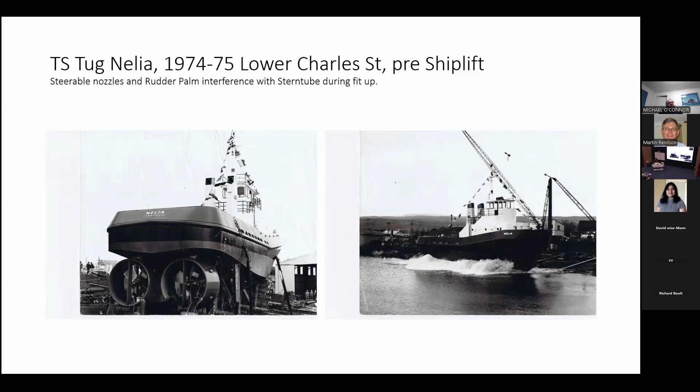During sea trials: first off, the rudder stocks below the neck bearing were 5 inches, talking old money, and above the neck bearing, because the rules said so, they were turned down to 2.5 inches. The builder and the machine shop tried to talk the designer into changing the size to about 4 inches, because it was just a waste of material and time turning it down. They wouldn't have it. During sea trials, going full speed astern and hard over to hard over, the rudder stocks twisted.

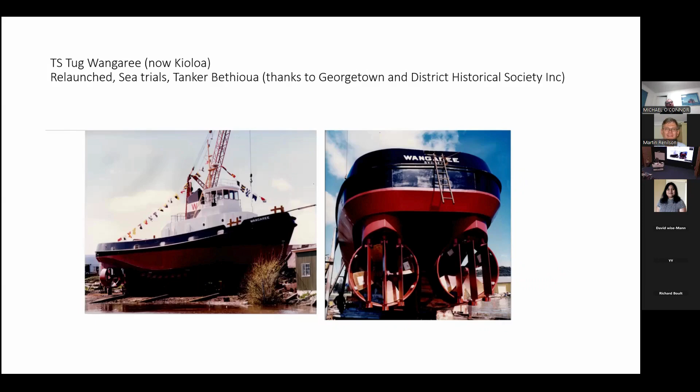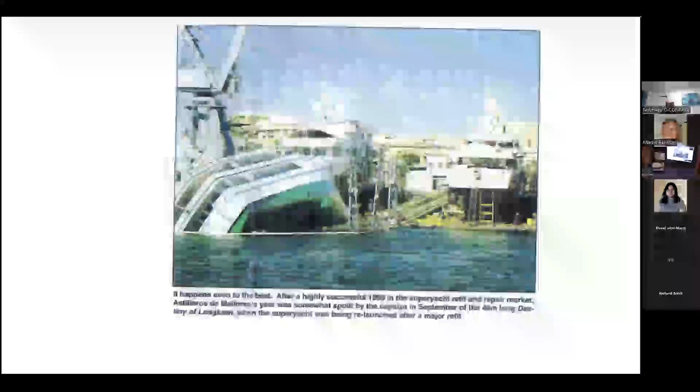Next one, that's what happens when side launching. That's just a little something I show the owners at launching time. Stuff happens. Yes, it can be a little bit dramatic. Of the vessels that fell over, Petuna Endeavour fell over as well at launching time. That one, Petuna Endeavour, the $500,000 trawler. She fell over to about 15 degrees at launching. So again, pull them upright, jack them up, build new cradles and relaunch.

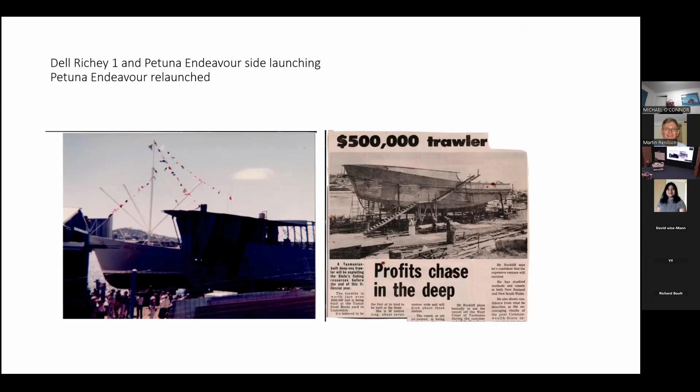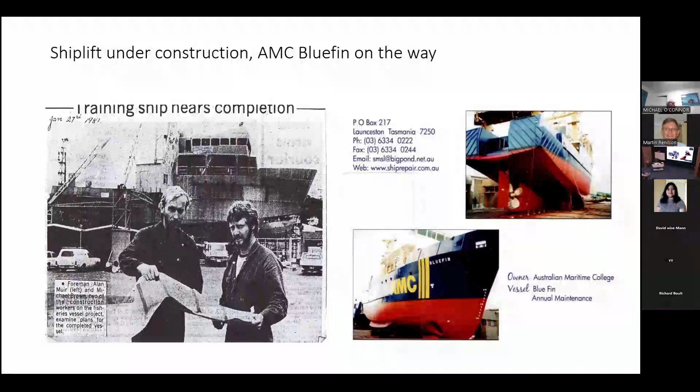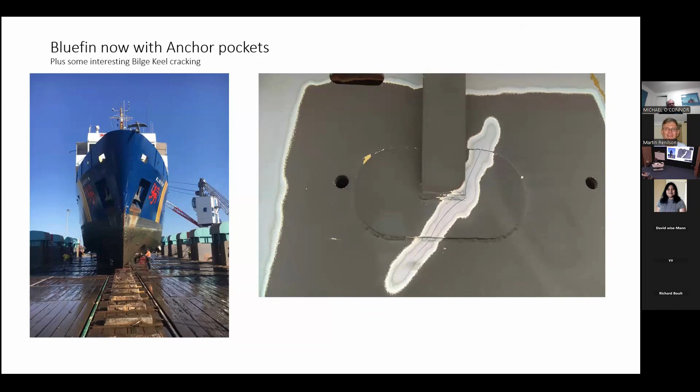There she is there. You notice from original, there's the bow of the original, no anchor pockets or anything like that. And that's one of the last photos. So she's now got anchor pockets and various other odds and ends. The bilge keel cracking on the right-hand side is of interest. It was quite a nasty little episode.

That's a close-up of it. Reasonably poor boilermaker skills there. They've still left all the splatter around and not a very nice looking weld either. But you can see obviously it started at the toe of the weld.

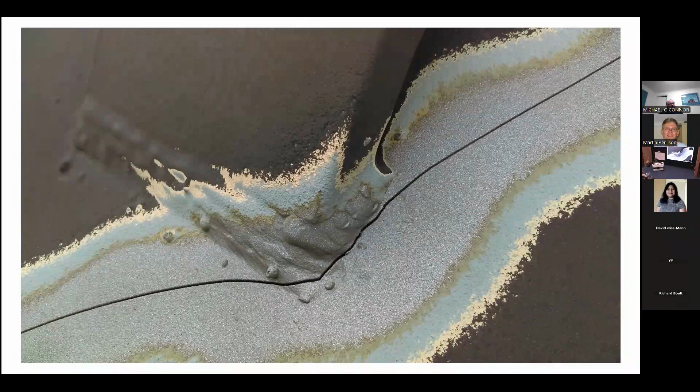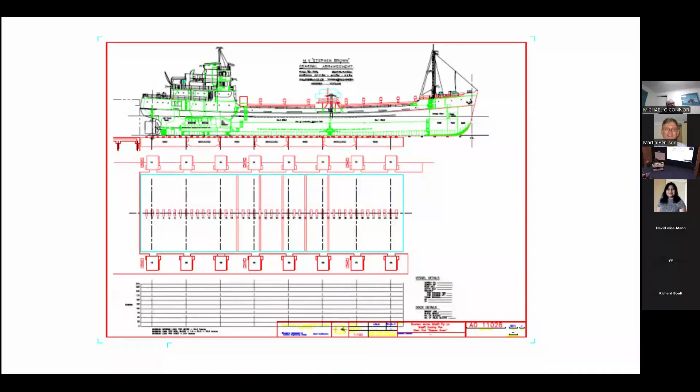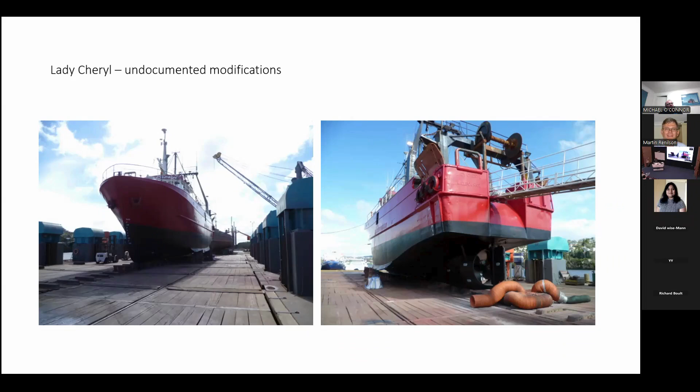And this one, you can just probably spot the undocumented modifications. So when she was designed, she didn't have a bilge keel. And if you have a look, that's what happens when you have undocumented modifications to a vessel and then you try and dock it using old drawings. You can see the sliding blocks. They're meant to go in under the hull, but the bilge keel is in the way.

That's what happens. With these sliding blocks, the lift will drop down, the vessel will come in, they'll lift the vessel about 100 or 150 mil, and then the sliding blocks have got ropes on them, and one of the dock workers on the other side will pull the block through, and when they hear it hit the hull, they

keep lifting up. But if anything happens to be in the way, like bilge keels, zinc anodes, echo sounders, bilge keel pipes, anything extra that's been put on or undocumented, that's where the slider will hit for sure.

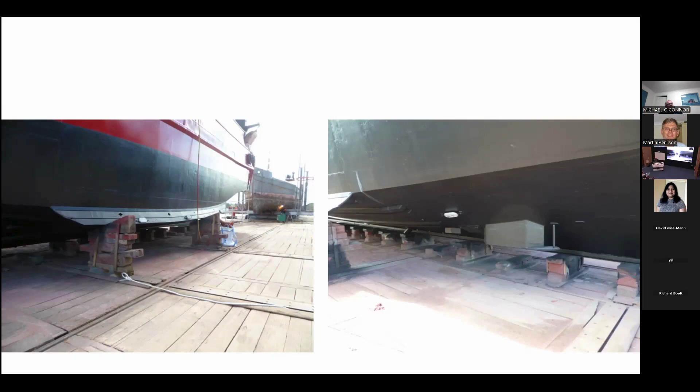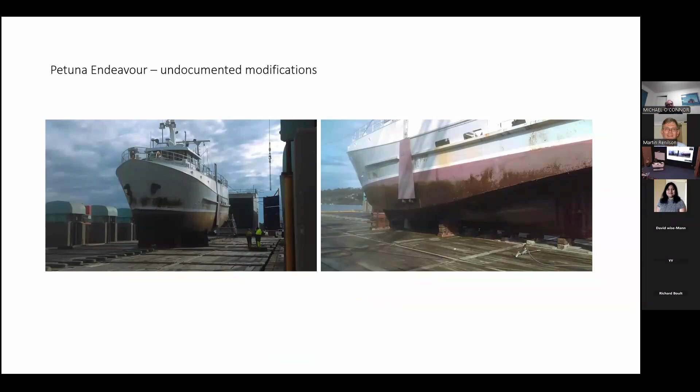That's Petuna Endeavour. Again, undocumented modifications. It's what we call the bat wings on the side. If you have a look at the front block, front sliding block, it's not quite in there. And if you have a look at the stern, it's not touching.

About 2 metres from the stern, there seems to be a seam up the side. And that's because they added about 2 metres onto the stern of the boat and didn't update the lines plan. So when we docked it, the breast line, which is the line from the very aft end of the boat to the beginning of the dock, was off; the boat was 2 metres further forward, which upset the sliding blocks. As you can see on the right-hand side photo, the forward block is right on the front edge. Just managed to catch the chine.

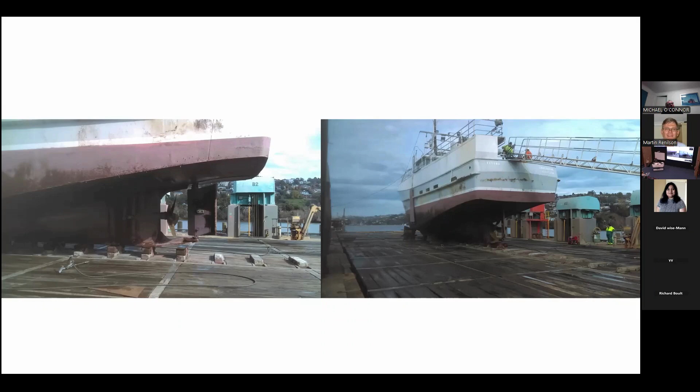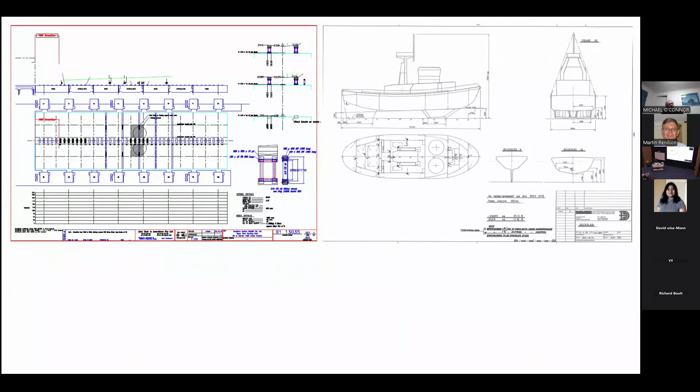Next one, this one, an interesting docking. This is a Voith Schneider tractor tug. And we'll go to the next slide. So there's the docking plan, and that's quite a detailed bit of information that you get from the owners on the right-hand side for docking the vessel.

Because we had to take blades out of the Voith Schneider to do repair work on them, some of the platform's timbers had to be removed underneath the Voith Schneiders to allow for removal of the blades. So you can just see the hole.

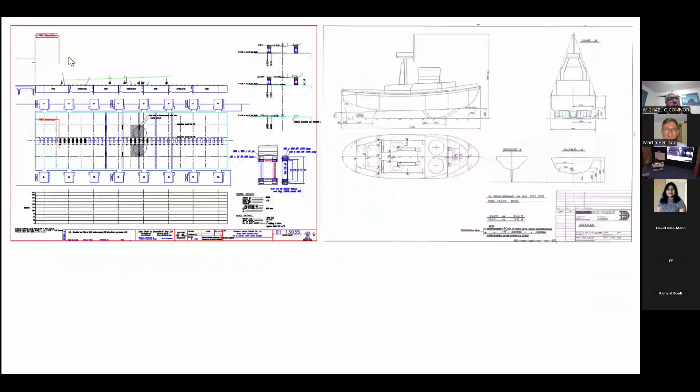So they've got, just roll it to the previous screen somehow. Yeah, just, 2 minutes. So she's got three sliding blocks. Oh, he's done it.

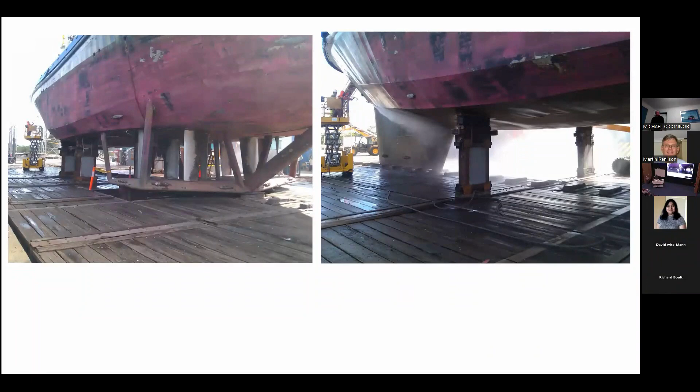And these sliding blocks, because the hull's so far out of the water, they're rather skinny and long. So that's with the timbers taken out to allow removal of the blades for repair work.

The finished product on the right-hand side, ready to go back into the water.

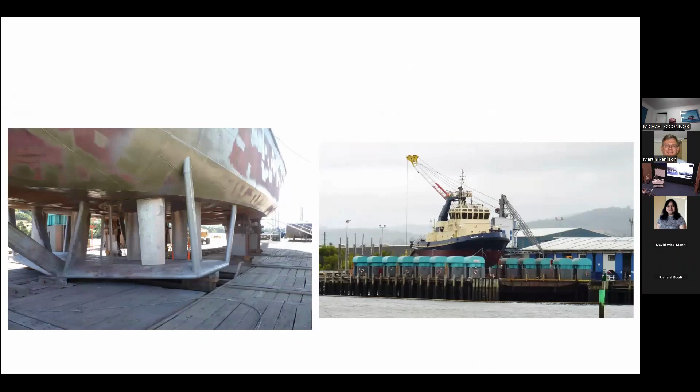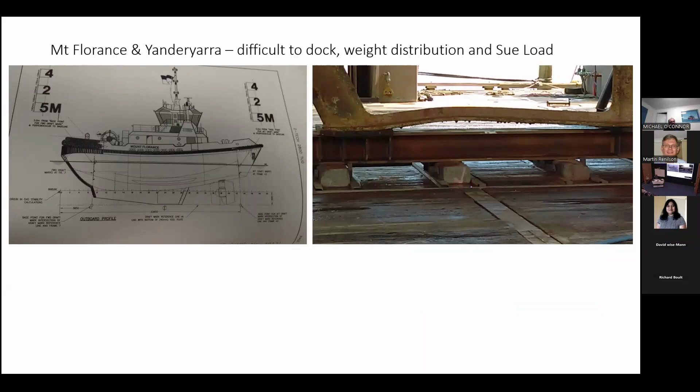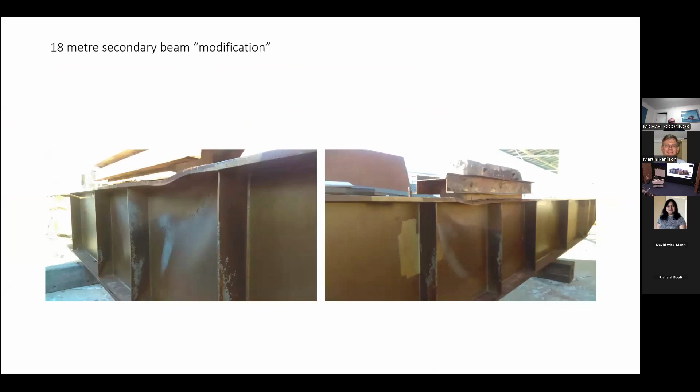The load at the stern of that vessel was just too great, so we bent the sole piece and created a few problems. That beam was about 750 deep and 18 metres long, so to buckle it up like that was quite a substantial Sue Load.

What we had to do in the end was put a substantial bit of universal column down on the beds and provide an adjustable prop at the stern to take a bit of weight.

That adjustable prop rotates - it's laid flat, the decks drop down, the boat goes in, the ram is tilted up and engaged. Inside that tube there's a 200-tonne jack, and that's engaged to put pressure onto the stern to take some of the weight. Even though there are sliding blocks on the side, the configuration of the skeg and the weight distribution was just too much.

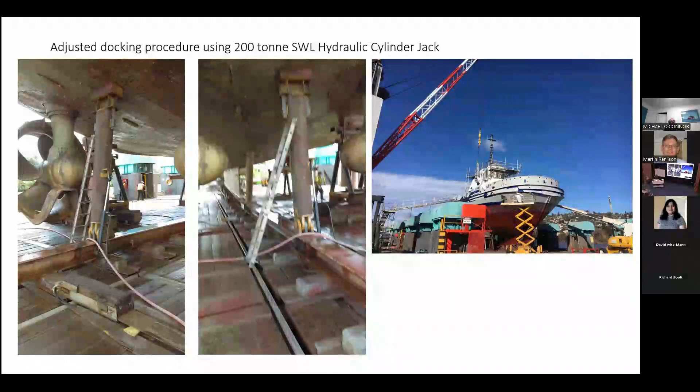That's the docking - the final docking plan, and the finished product. You can just see this: the sliding blocks are there, quite close to the ram, and the ram's stuck in between the two nozzles.

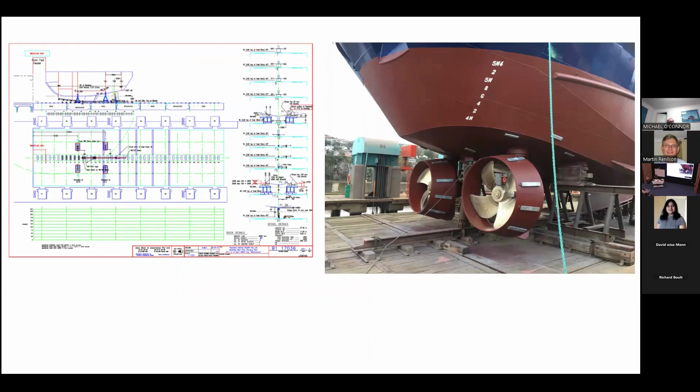This one was interesting - the King Island Wave Swell Unit, with the steel grillage. Over on the docking plan on the left-hand side, you can see the steel grillage that was put in underneath before the concrete was poured. That was poured in situ, so all the formwork was done on site.

Concrete trucks came in, the base was poured, and then the walls and everything else, up to about 700 tonne. It was interesting because the footprint of that is 15.5 metres by 7.5 metres, and it was 700 tonne. They did want more added to complete the construction, but the weight concentration was too much for the ship lift platform.

So only part of it - most of it was built at the King's Wharf, and then the top sides were completed down at Bell Bay.

We couldn't launch it or roll it with those steel buoyancy pods on the side, because each one weighed 50 tonne. So the concrete unit itself was on Hilman 50-tonne rollers - I think there was about 80 or 90 of them.

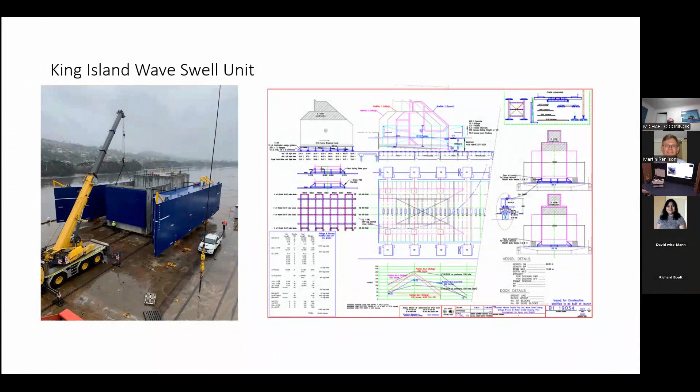There are four transfer rails, as you can see in the wharf apron. That's the big opening for the water to go in to operate the turbine, under tow towards King Island.

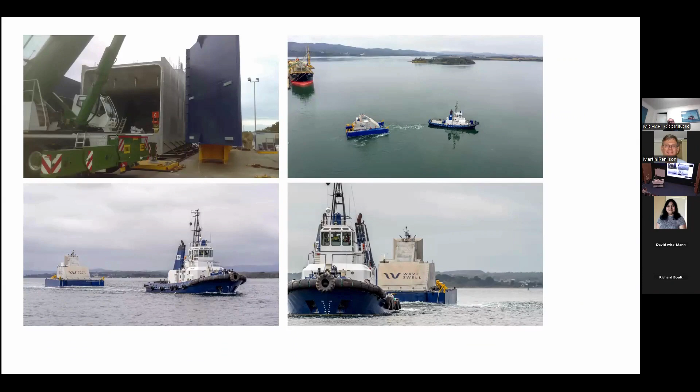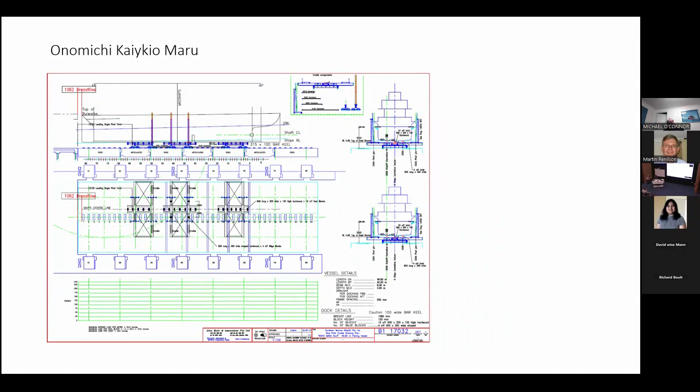This one's what I call the drug boat. It was about a 50-metre vessel that left China or Japan or somewhere, and came down Western Australia, around the bottom of Tasmania. The Federal Police, Customs and Border Force decided to pull it up, took it into Hobart, and found about $150 million worth of cocaine on board. So the vessel was seized by the Federal Police.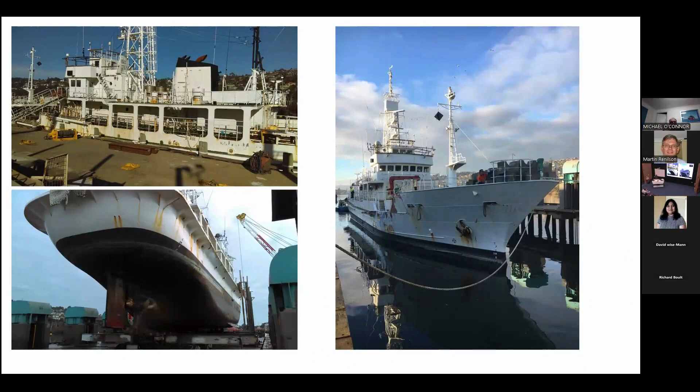It was brought up to Launceston, put on the ship lift. It's quite a nice looking hull, actually - I was a bit disappointed to see what happened to it. There it is there, nice lines.

Have a look at the top right-hand corner - there are 2 seawater inlets. Keep an eye on those. She's on the transfer trolley, so that was rolled onto the hard, and over about the next 12 months...

That happened - and there are the 2 seawater inlets that you saw earlier. So there's not much left of it. She was all cut up for scrap.

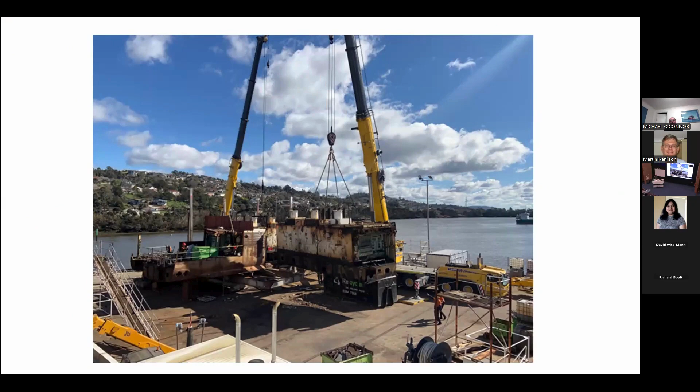So that's what I was saying, bit of a pity, waste of a good hull, really. Nice lines.

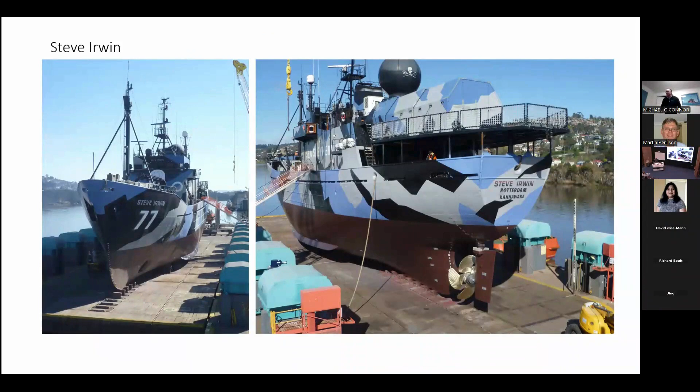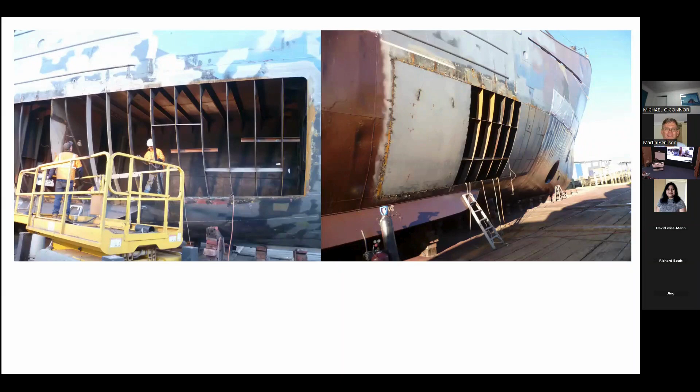And you can see the sliding blocks, bilge keels, anything else that can get in the way when you're docking the boat.

These are some of the larger vessels that are docked. This one's about probably 1,800 tonnes. The dock itself will take 3,200 tonnes uniformly distributed, 2,160 tonnes on a monohull, and I think it's 71 tonnes per keel block. So it's about a 2,000 tonne lift.

So when they start getting up into about 1,800 tonnes, the circuit breakers start to cut out a little bit and you have to spray them with Freon to chill them down a bit.

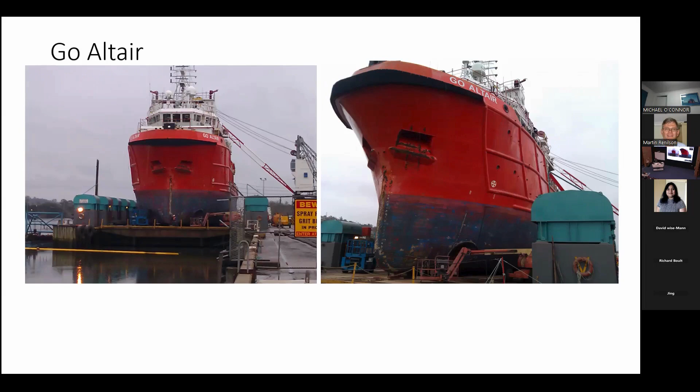We're restricted by draft at the ship lift as well. Not only restricted by draft, but restricted by visibility. So every docking is done blind. There's no point in sending divers down to check. You just lift them up and hope there's nothing in the way.

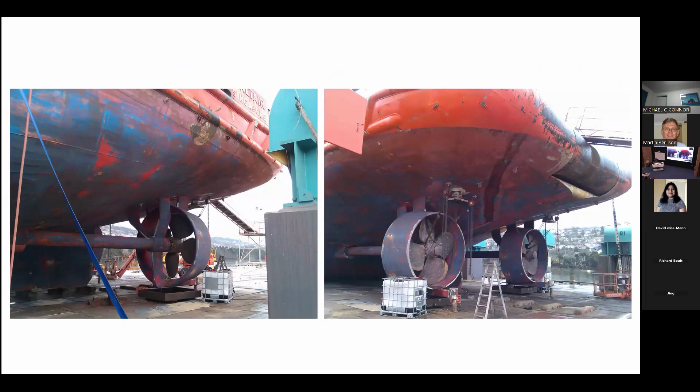But she was a big vessel, in for servicing, scraping the paint. Gets a little bit claustrophobic underneath.

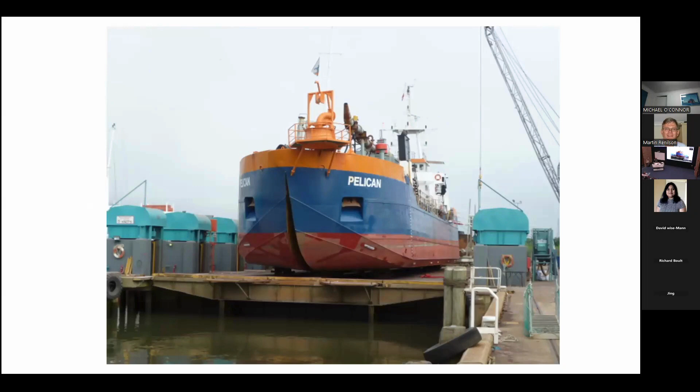And that's, to go back to the docking plan, that's got a slight overhang as well. But because it's the bow, it doesn't really matter.

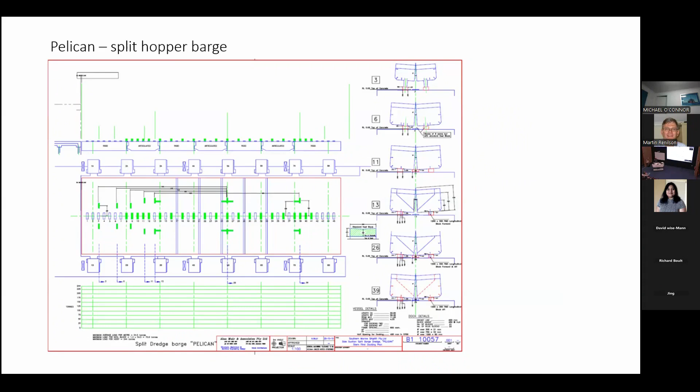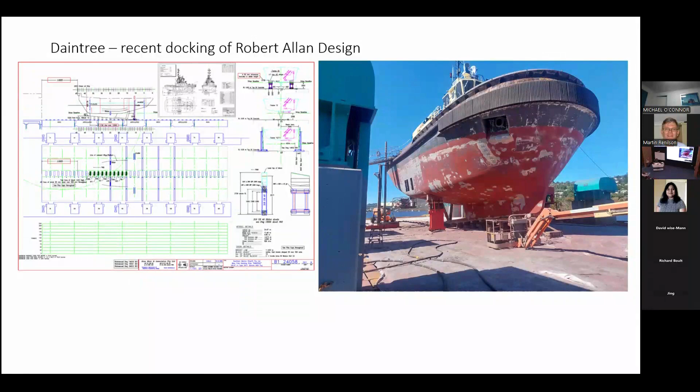There are, because of the length of the vessel, which is about 28 metres or something like that, they're quite compact. So you've got to dodge seawater inlets, zinc anodes, anything else that happens to be hanging out from underneath the bottom of the vessel. For those sliding blocks, this one was done with sliders, and also at the stern there's a side cradle.

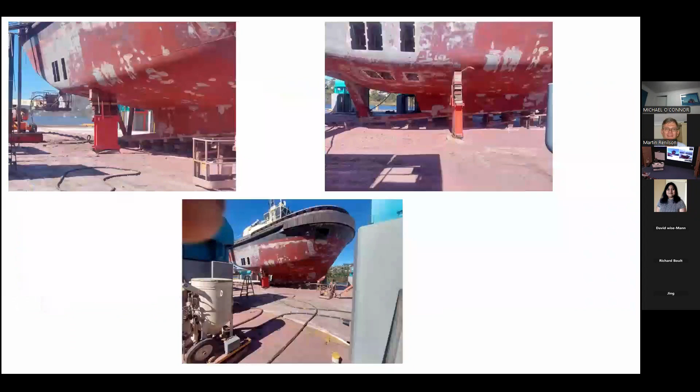There was only room to fit in one slider, port and starboard. But when you see them like that, it can be a little bit precarious. There's not much holding them up. And you can't quite see it, but those are on a bit of an angle.

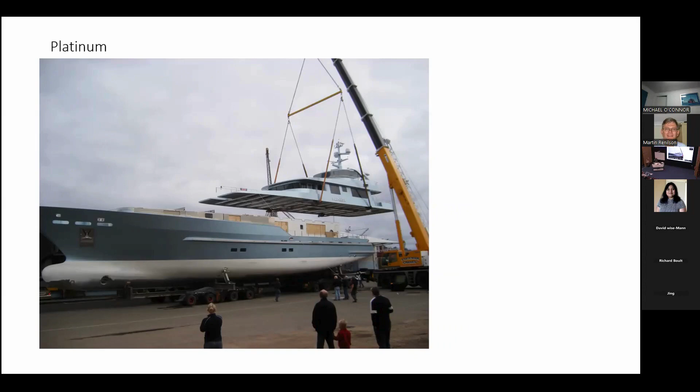That was an interesting one. No mishaps on that. Oh, apart from during sea trials, the owner had insisted that stainless steel doubler plate in around the anchor would hold on with silicone. So we dutifully siliconed it on. During sea trials, that got peeled off halfway, so she had to go back up on the dock, and it was welded onto the hull in the end.